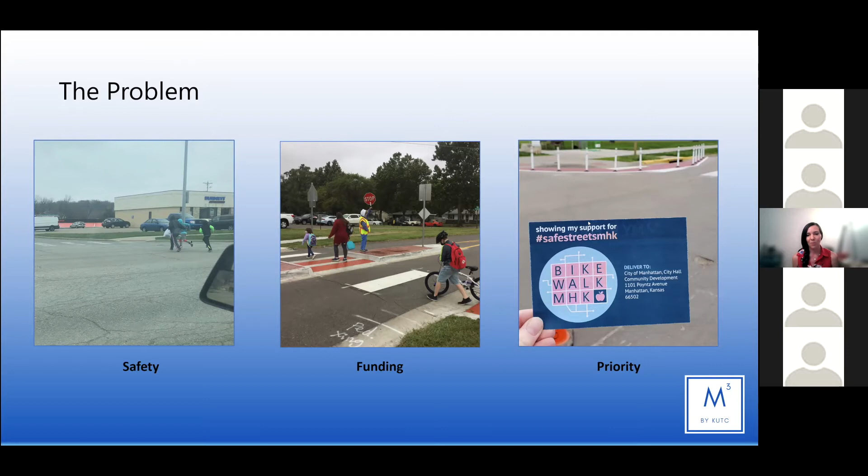At least in our communities, bicycles and pedestrians don't get the level of priority that roadways do. So at a couple of our events, we've used what you see here. We call these pledge cards. On the back, it says 'walking and biking are important to me because,' giving community members an opportunity to say why they walk and bike and why it should be a priority for our communities.

We were able to collect almost 200 of these at one of the project sites, and we gave them to the city commission. Just because people aren't showing up on a Tuesday evening at 7 p.m. to voice their support for walking and biking, it sends a pretty strong message when you have a couple inch thick stack of these that you can take to them.

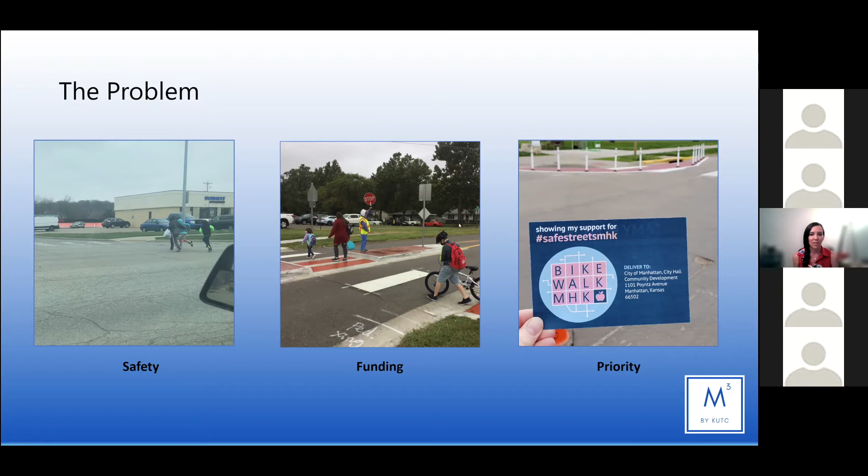So the problem we've had, we spent a lot of time trying to figure out a way around this. What we determined to be probably the best solution in our case was this idea of iterative project delivery, meaning we don't have to have either nothing or full construction - there are steps we can take in between to help promote pedestrian safety without spending hundreds of thousands of dollars on just one project.

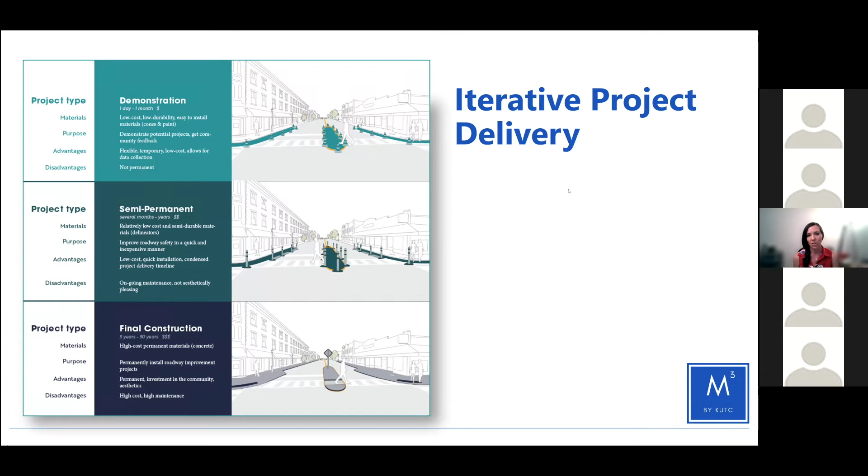The first component of this is what we call demonstration projects. We've found that word 'demonstration project' isn't something people are really fearful of. It gives the idea that we're just trying it out and it's not anything that's going to be permanent.

For us, we have them up for about a week - that's really the amount of time we've found to be effective. However, weather is really a determining factor, and Jared will get into some of that with his portion. But they're really low cost and easy to install, something Jared and I can easily install ourselves, and it just takes a couple of hours depending on the scope of the project.

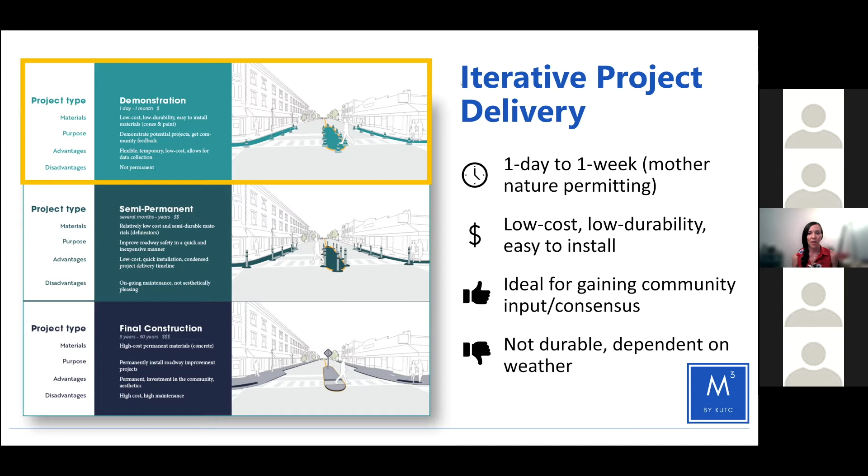The demo projects are really good for gaining community support, for people to actually experience them. When we talk about pedestrian islands or curb extensions, it's hard for some of the public to really visualize what those look like. This allows them to interact and really experience it, so we can take some of that unknown and fear away.

I wanted to walk through some of the projects we've done in Junction City and Manhattan. We're going to start in the northwest area of Manhattan. This is a residential neighborhood, but there is a trail that goes north-south along here, and several residential streets cross it. So at those intersections, we've done several projects.

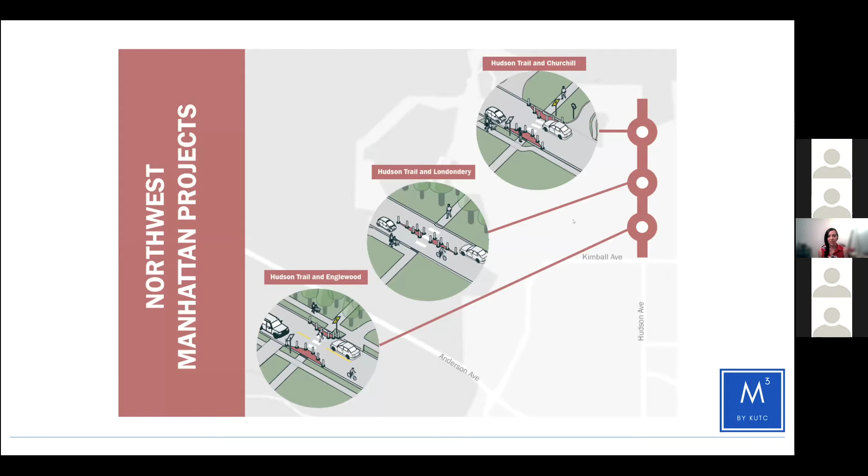This is kind of our existing conditions. It's a fairly wide residential street because parking is allowed on both sides. However, there isn't a lot of parking that actually occurs, so the roadway, when you're a motorist, feels a lot wider than what it needs to be.

At two of the locations, we decided to do curb extensions, which you can see here. We added this double striped yellow line to tell people there's two different travel lanes here and to respect that. But when we were out observing, people weren't very receptive to just the pavement marking. So we made an on-the-fly decision to put in these yellow delineators at either end, and it seemed like people were more willing to respect that yellow stripe when there was this vertical object in the roadway.

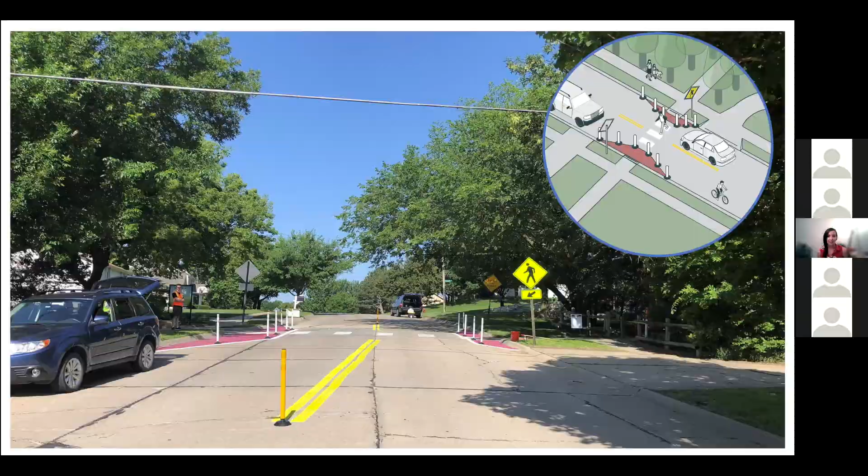At the other location, we did a pedestrian island. This was much more effective at slowing vehicle speed and increasing yield rates. As a side note, we're actually going to be installing two of these along this corridor as semi-permanent projects, which we'll get to next. But we've opted not to do the curb extension and just to make both of them the center pedestrian island, because it really was more effective at slowing traffic and increasing yield rates.

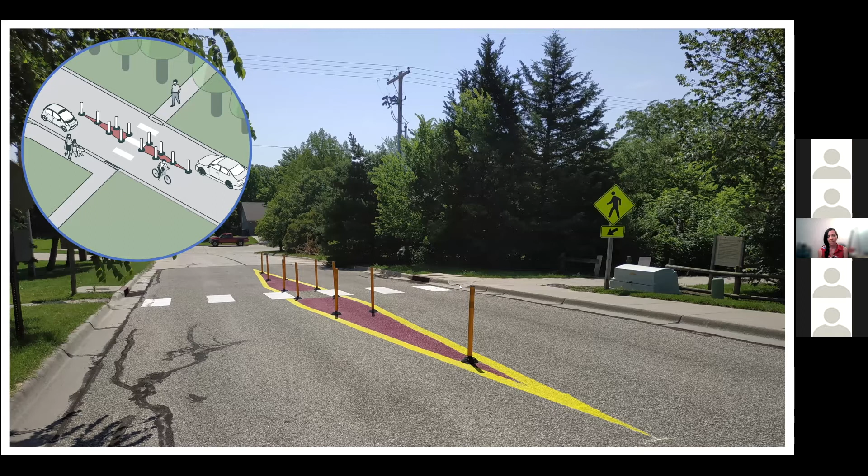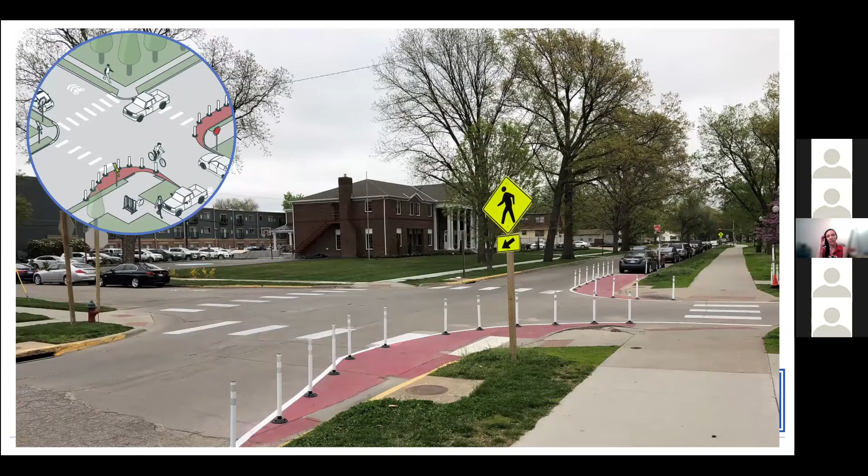And then the last one to share with you from Manhattan—this was, I think, the project that probably received the most attention. This is kind of in the heart of our community. Here off to the right, that's our city park, and we're looking at the trail that goes along that park. Off to the left of the page, Kansas State University is about 2 blocks away. About a block away is Aggieville, which is kind of a high destination bar and restaurant district. So this receives a lot of foot traffic, a lot of people walking and biking to the university, as well as vehicle traffic.

When we put up this project, we interacted with hundreds of people that were using it in all different modes. And when we would tell people this is only up for a week, they'd be like, no, please keep it. Please don't take it down. We love this so much.

And we do have a success story with this, in that this is going to be moving to permanent construction. Our local transit agency—you can see the bus stop over here—actually received a grant to make these curb extensions permanent. There's going to be rain gardens. The trail is going to be a raised crossing to give priority to bicycles and pedestrians rather than vehicles going past this to get to a parking lot. There's going to be a bus shelter.

So it was a really—I wouldn't say that this demo project made that final construction happen. I think it just brought attention to it and gave it more priority than if we wouldn't have done it.

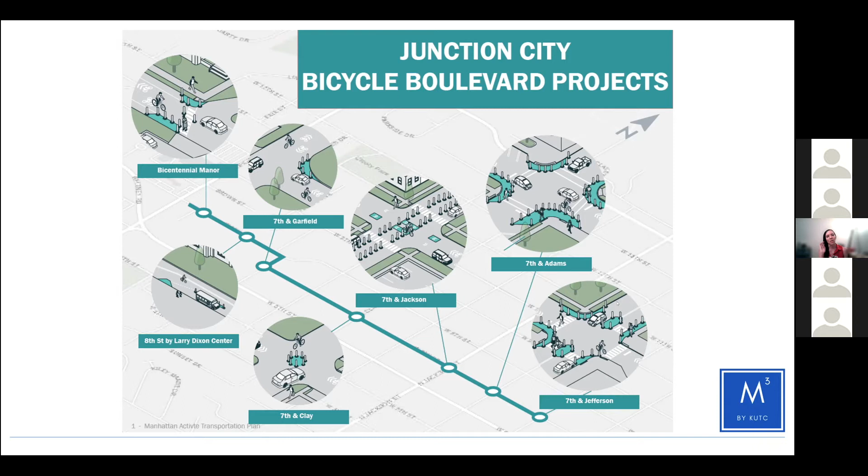Going through a couple of those projects, this is the most ambitious demonstration project that we undertook. It was a right in, right out sort of project that closed down through traffic on the bicycle boulevard. The bicycle boulevard in this bottom picture is kind of running in front of us there.

As we were installing this, we had help from Junction City crews as well, though we got called a lot of colorful names. People that were driving were not happy with us. We were disrupting their normal commute, blocking the alley that people use to get to the KFC, and had people making all sorts of wacky turning movements trying to avoid this. We were just like, oh man, this isn't going well at all.

But then when we started talking to the people that were walking and biking, and even the residents that lived right around there, they absolutely love it. The residents came out, they're like, people aren't racing up and down our street. They're actually stopping at the stop signs. We can cross the street and people more often than not yield to us now.

So we invited the mayor out so he could hear some of this as well, because we knew that he was going to get a lot of calls with nasty messages from the motorists that were like, what are you doing to my roadway? And he was able to experience how different this felt with this project in there.

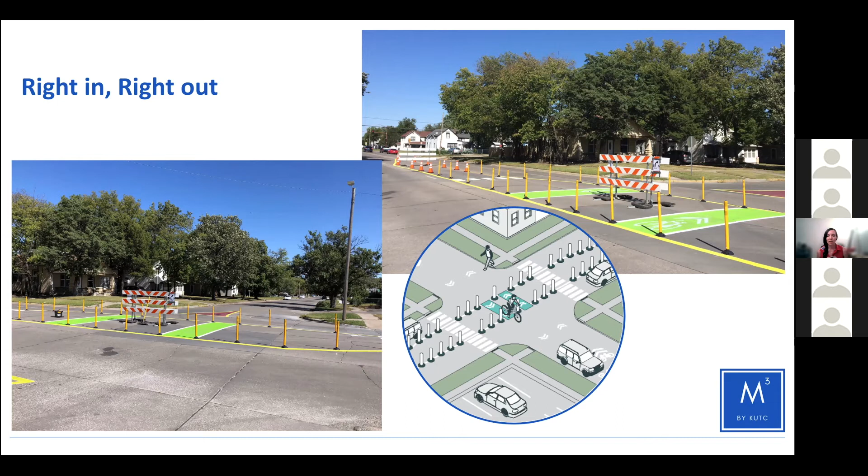We also, kind of in the middle of the bicycle boulevard, installed a chicane with a bus drop-off. There's a school district building right here to the right, and they oftentimes have kids that get off to go in that building, so we decided to make them a formal bus drop-off.

What I would note on this project is we always kind of start on the outside. So we install the curb extensions you see here first, and then we kind of work our way towards the middle of the roadway.

When we had the double yellow line in there, kind of separating travel lanes, we had a lot of folks that weren't being respectful to that paint. So we had to add in these 4 delineators that you see here on either end. And as soon as we had those delineators there and that visual barrier, that's what made people move to the correct side of the roadway and really slow their speeds down.

I would say the same thing about this median here with the 4 delineators, that having those delineators was essential for people kind of staying between those paint markings.

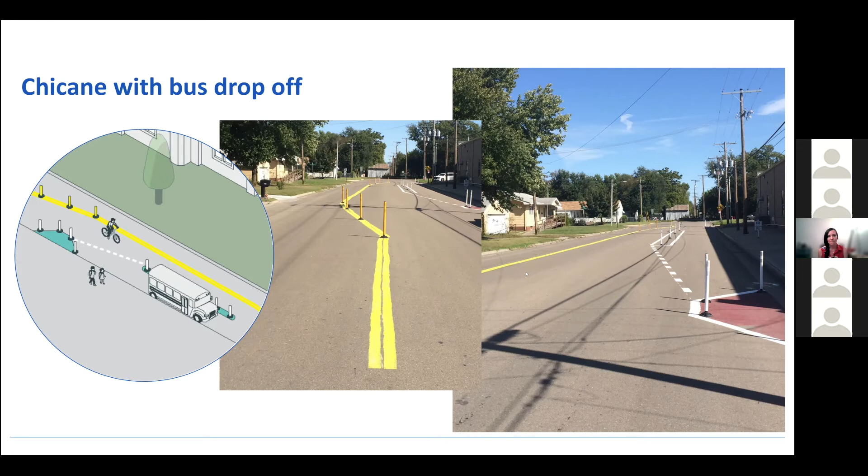And then the last one to show you on the bicycle boulevard was a parking stripe and a crosswalk combo that we did at the far west end. This is right in front of a senior apartment building, and there is parking allowed on both sides of the street, but there aren't always cars parked out there, so the roadway feels a lot wider than what it really is. And it's just a straight shot all the way down, so you can go pretty fast through this, and we definitely observed some of that.

So the parking stripe was just to kind of make it visually feel a little bit more narrow. We did use traffic tape for the parking stripe, and we did this project 2 years ago, and that traffic tape is still there, which the city doesn't mind at all. But if you're truly wanting to do a week-long project, traffic tape probably isn't the way to go on this.

And then we had the curb extensions that you can see up here. Again, the curb extensions shorten that crossing distance for pedestrians, but they didn't really make motorists slow down like we were wanting to, and to be more aware of that crosswalk.

So what we learned from all of our other projects is that we needed to add this yellow delineator here in the middle of the roadway. And you can see Jared with the other one sprinting out there to try to put it in place before I took this picture. And once we had that in, again, people stuck to their lane and they slowed down more than if it wasn't there. So that's something that we've learned going forward, that we need to make sure that we have on these projects.

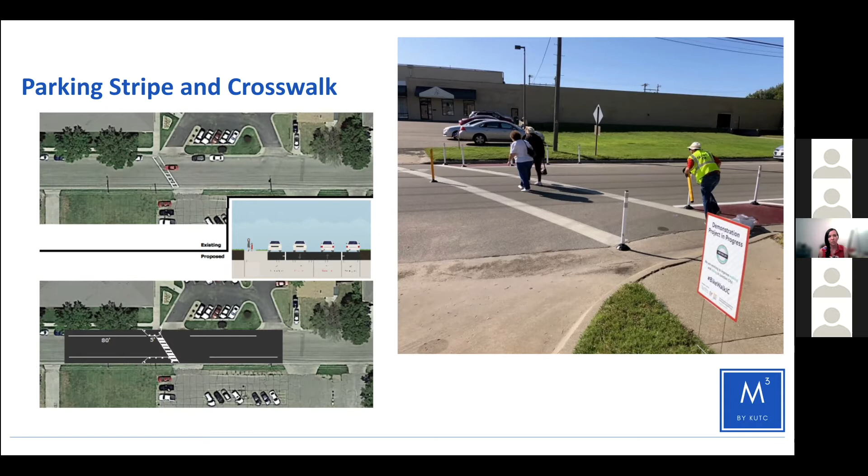So those were the demonstration projects, our week-long projects, really to just test out and get the community's feet wet when it comes to bike ped safety improvements.

Now what we're starting to work on are semi-permanent projects, since we heard from so many people like, why is this only a week? Why are you guys taking it down? Please just keep it up here. We knew that we needed to do something rather than just sit around and wait for concrete construction dollars.

So the semi-permanent projects we anticipate are going to be up for several years because of the type of product we're using and how we're installing those. They're still really low cost and quick to install. However, the MPO staff won't install these, which Jared will get into a little bit more. They're ideal when you want to make a quick safety improvement but don't necessarily have the time or the dollars to wait for final construction.

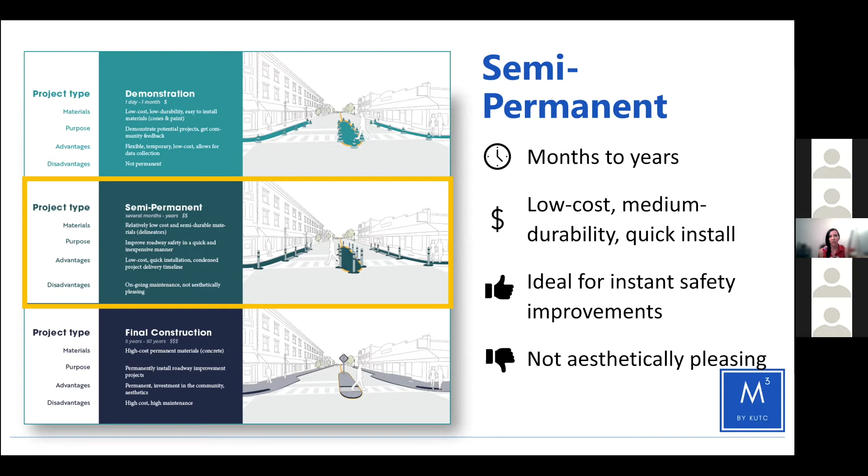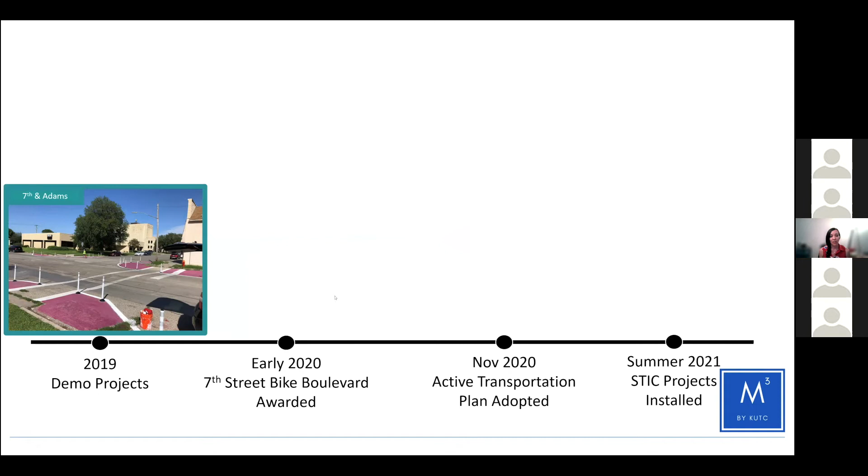So to give you an idea of how all of these things have fit together with the Junction City community, in 2019 is when we did all of our demonstration projects in Manhattan and in Junction City. And then in early 2020, the city of Junction City applied for a transportation alternative grant to make the bicycle boulevard permanent construction, and KDOT awarded them that.

And some of the feedback that we got from our state DOT was that because you guys were able to show that the demonstration projects were so successful, that you had community support, that they really served their intended purpose, we are going to award this project. That was kind of a big note that we took away.

And so now if we want to do a similar project, we know we should probably start with a demonstration project to be able to show we have that community support. And then we had so much momentum going with Junction City actually being like, yes, let's move forward with bike ped, this is a priority for us. And we were like, okay, we need to back up and go back to our planning roots and develop an active transportation plan for them.

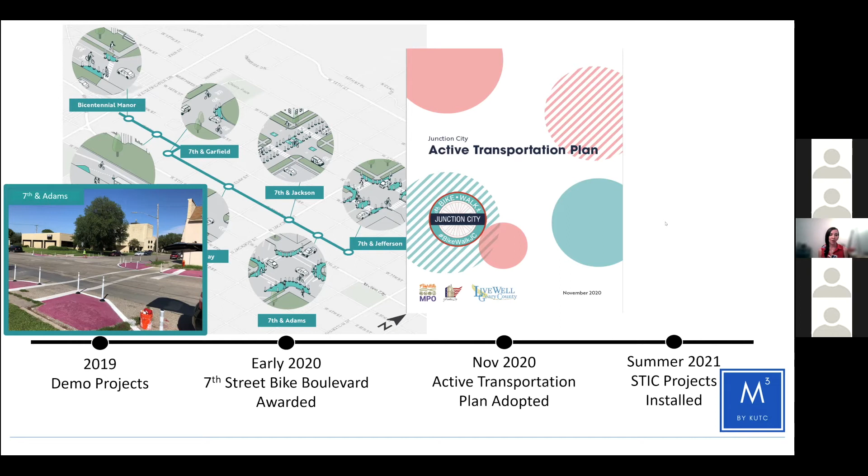So the MPO did this in-house. It has a list of priorities, it has some performance metrics in there for them, and they can really work towards starting to check off some projects from that list. And because they don't have a lot of funding available for permanent construction, we've identified the projects that would work really well as a semi-permanent project.

And so we were actually awarded some State Transportation Innovation Council funding, which is STIC, to install 5 semi-permanent projects in Junction City, and all of those are near elementary schools. So it fits really well with the Safe Routes to School plan that the MPO developed for them a few years back. So it kind of helps to implement Safe Routes to School and the active transportation plan.

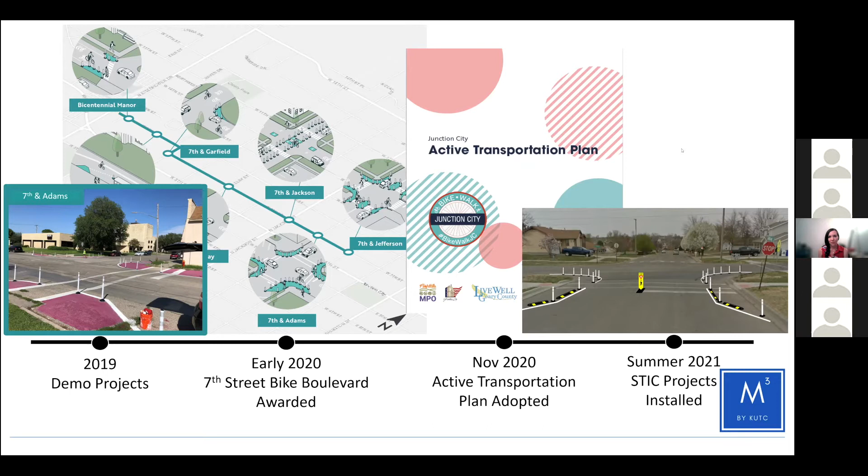And to give you a few ideas of what these semi-permanent projects are going to look like... So this is one of the pedestrian islands.

It's the same materials really that we used for demonstration projects, although we added in some rubber curbing. The thought is there that you might be willing to hit a plastic delineator that bounces back up with your vehicle, but the rubber curb is going to be a little bit rougher, so hopefully that adds some longevity to the project.

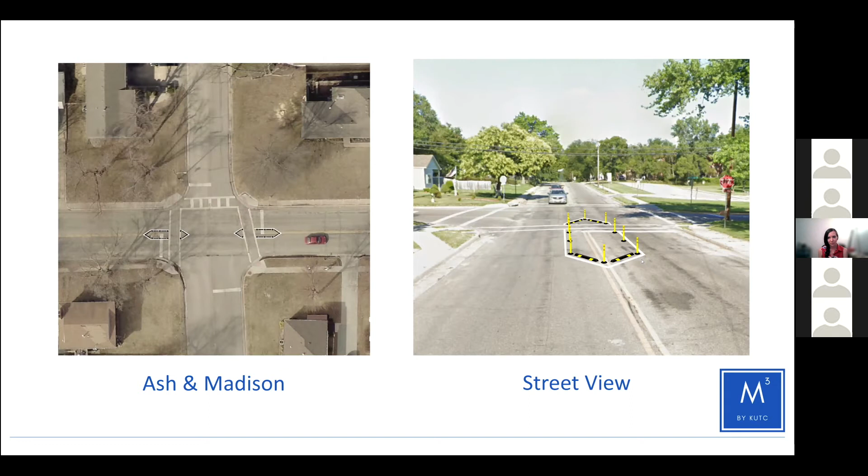And then another countermeasure that's identified in STEP are curb extensions. And so we again have the plastic delineators and some rubber curbs. And just like with all the other curb extensions, we learned you have to have something in the middle of the roadway to really kind of define the 2 travel lanes.

But also with Junction City being a transient community because of the Army installation, we decided it would be good to add this state law yield to pedestrian sign, just a gentle reminder of what our state laws are, especially for people that are maybe new to the community and aren't aware that you should yield to somebody in the crosswalk.

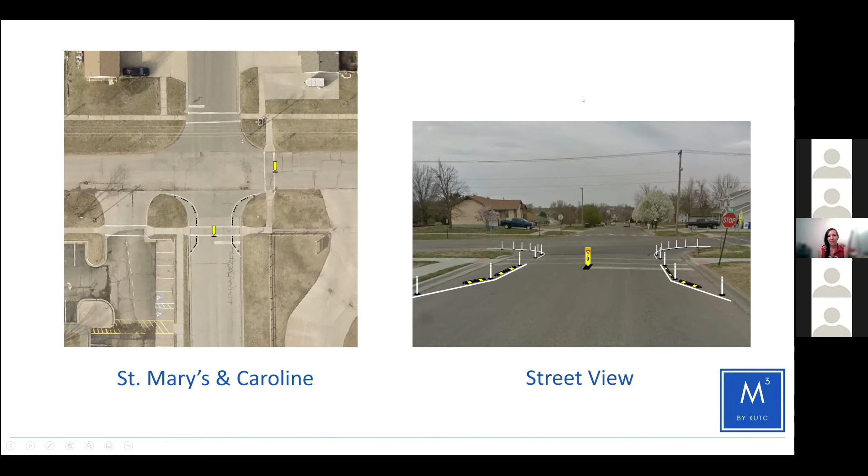And then looking forward, there's one other example that should be coming up here in a second from Manhattan, and it's... there we go. The very first demonstration project we did in our region was at this intersection.

There's Manhattan Catholic schools that occupy 3 of these different buildings, and so there's over 6,000 kids and teachers walking through this intersection every week, going between the church and their 2 buildings. This was something the school had a lot of close calls reported of potential crashes between students or pedestrians and vehicles.

So we decided to put out these traffic cones thinking that we'll create these curb extensions, and the traffic cones are not a great idea. Some of them got dragged away by vehicles. We live in a college community, so I think some of the cones went to live with some of our university students. Over probably 6 months, there weren't many of these left.

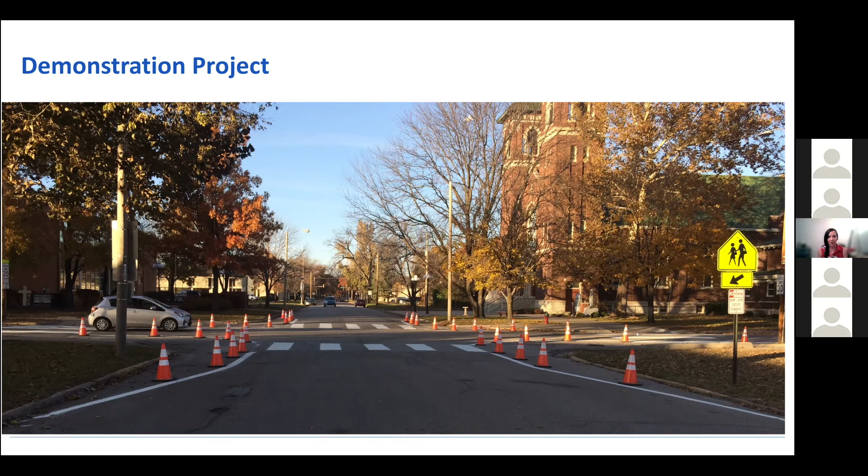But we are happy to report that we're going to be able to do a semi-permanent project at this location, which the school is elated about, to really make this intersection safer for everybody using it. That project is moving forward this fall. And with that, I'm going to turn it over to Jared, and he's going to walk through some of the more technical aspects of the projects.

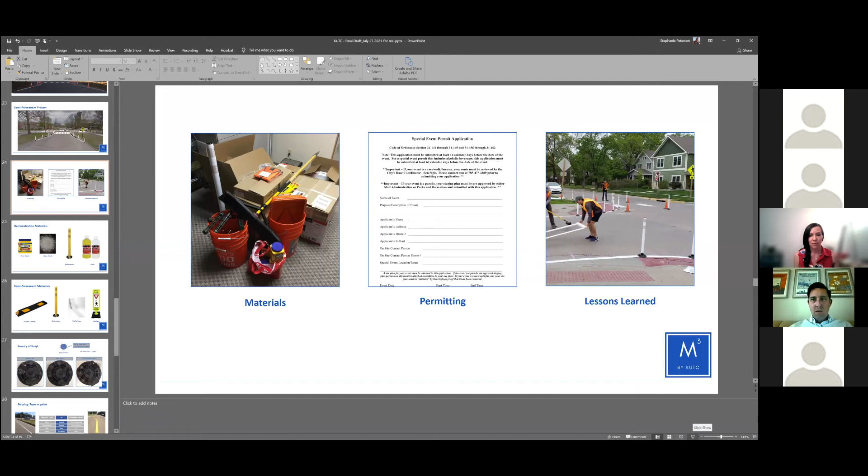The city did take speed counts before and after. It's a school zone, so the speed limit is 20 miles an hour during school. Before the installation went in, it's a 36-foot wide street, and the average speed was 28 miles an hour. During the installation, it dropped to 21. So it had a major impact on speeds.

I'm going to talk more about the nuts and bolts of how we went about doing these, and we're going to focus on materials, permitting, and lessons learned.

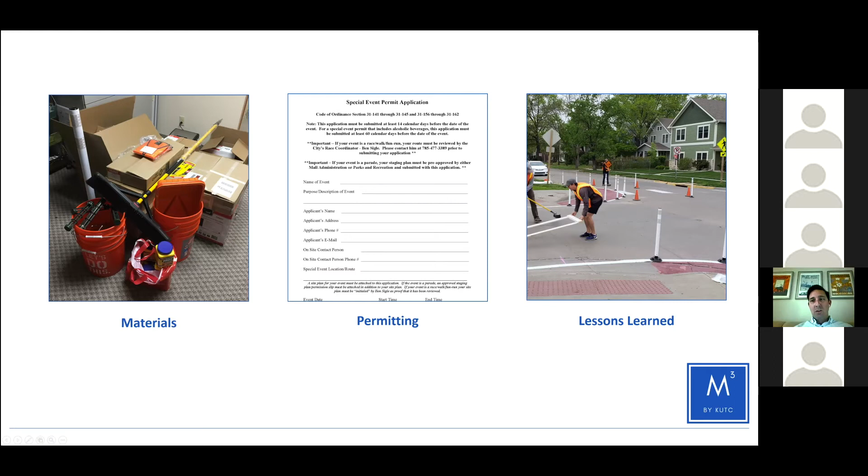So again, our demonstration project materials were really simple. We're talking kids paint here, tempera paint. We would mix it with water or with cornstarch to thicken it. And then we would use the flexible delineator posts and glass beads to do an attempt at retroreflectivity. It was somewhat effective.

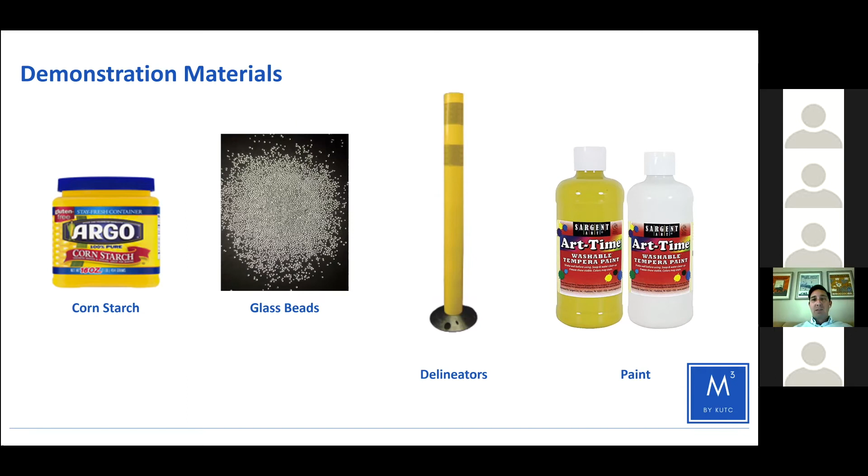Whereas when we step up to semi-permanent projects, the paint goes away and traffic tape comes in. We keep the delineators, and then we bump up the security for pedestrians and cyclists with rubber curbing, because in truth, paint isn't protection, and people will run over a delineator, but they don't want to hurt their cars. So when the curbs are there, they don't.

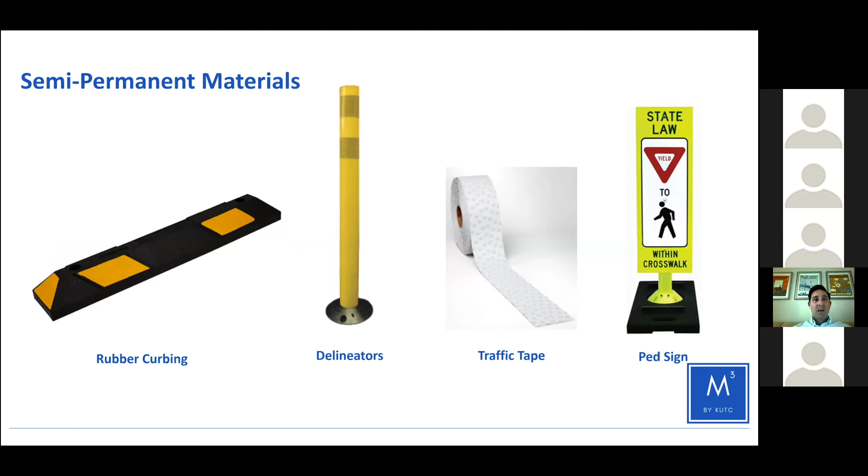The beauty of butyl. So with our demonstration projects, we use butyl pads to quickly install the delineators, and we've learned a few things along the way. Each butyl pad is 8 inches wide, and it fits along the bottom of the base, which you can see here. You're supposed to use 1 butyl pad per base.

And finally, we were - I don't want to say lazy, but it's not fun to remove the butyl from these. So we started sticking a second layer of butyl on top of it, and that's about as far as you can go. After that, you do need to start removing the butyl layers. But it's a great way to be very efficient with your money and also quick with your time, and it works just fine.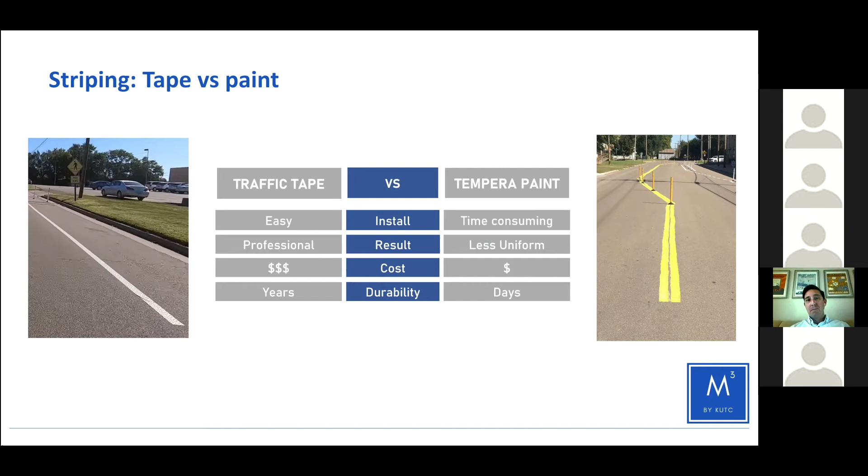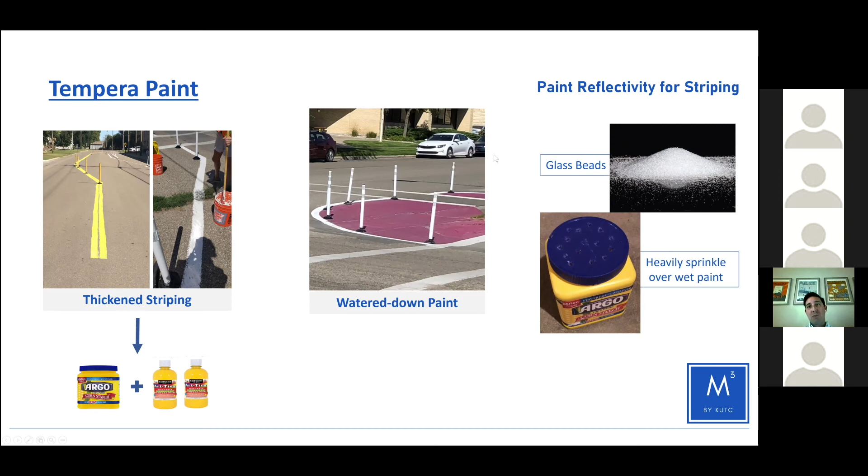Back to the left on the striping, we only use glass beads on the striping. It can be done with one person, but it's best to have two. One person paints, and the person behind gives a heavy sprinkle of glass beads right on top of it. We found that taking an old starch container, filling it with glass beads, and poking holes with a screwdriver is the best way to do it. These are all real practical, simple solutions, and they worked great.

We all have these ideas, things we'd like to see, but actually getting the process going was hard — figuring out what we needed to do, who we needed to talk to, getting an okay in this town versus that town, and the different hoops we'd have to jump through. In Manhattan, they have special event permits for things like parades and street fairs, and that's the process we ended up working with them to create.

It's been really effective. It allows them to have a formal process where code, public works, and the fire department all look at the application. So we get a lot of eyes on it and are able to alleviate a lot of issues before they become problems. In Manhattan, we also use engineered stamped plans. City Public Works felt that was necessary. It alleviates some liability and makes it easy for us to install.

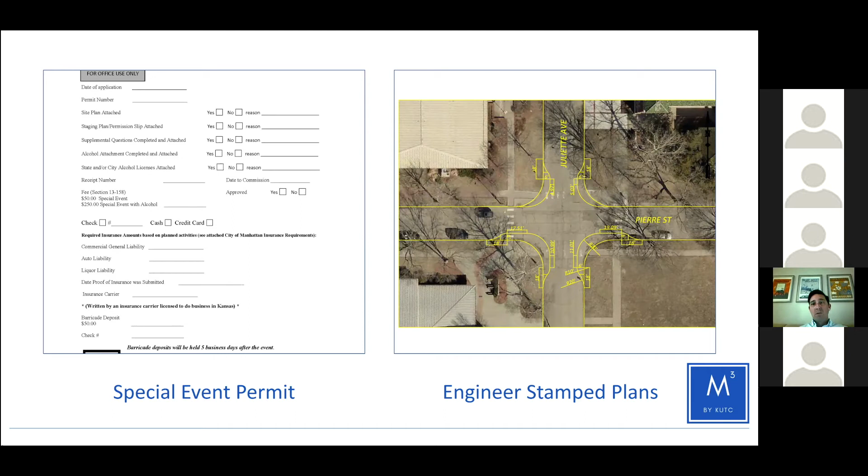For the demonstration projects, Stephanie and I do the install, and it's very simple math — simple radii, measuring out. We have a string, chalk, and measuring tape, and drawing it out takes 10 minutes. There's absolutely nothing to it.

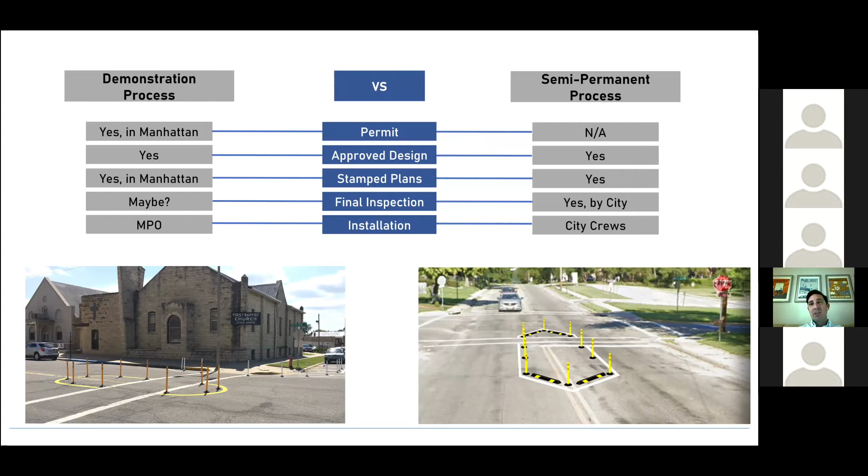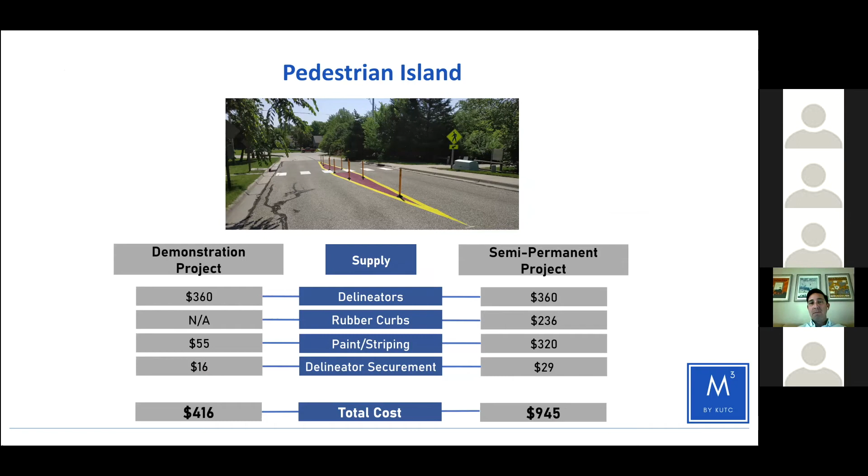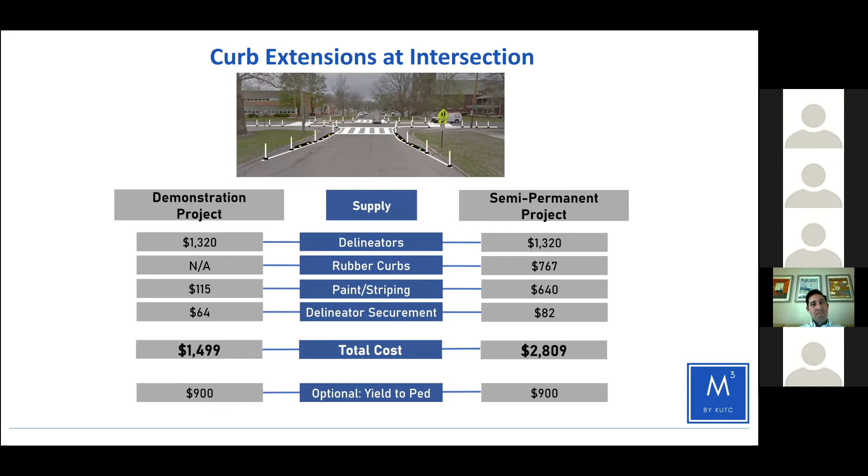So now I'm going to get into some lessons learned just real quickly. We have several materials available. We did these for a year, and then we waited a while and forgot some things, and we thought, oh, we should write those down. So we do have a technical guidance and lessons learned document.

It goes a lot more in detail about the things I've talked about here. We get into paint ratios, to water ratios, to cornstarch ratios. Really gives you a simple how-to, follow along. Things such as storage - you know, all these things come in boxes. You use them once and then what do you do? The boxes are torn, you can't reuse them. So we've gotten into those sorts of things as well.

And then our demonstration for change is really kind of, like it says, a lookbook of our projects. It just highlights what we've done, different applications, and where they've been. And then the how-to guide is something we will be working on.

We've been working with KDHE and their CDRR grantees to work with really small communities. What we're hoping to do is make this so simple and available that communities of under 1,000, who don't have staff on their own, can really do these things by themselves or with a little help from us or someone else. Just make it very, very simple, because if they don't have the staff to do it, they probably don't have the funding to do it themselves. But it's something that can be done near schools and really help implement changes across the state.